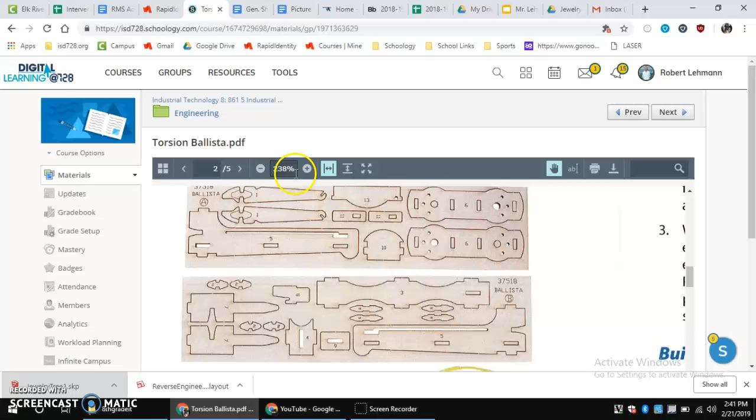So down here in the bottom, we have 3 PDFs that show us information about what you need to make your parts. Now, if I click into the ballista, it's going to open up the PDF. It does take a little while to load. And we are going to go down here and scroll through the document and find where the material parts are. Now, I'm kind of zoomed in already, it started at 238%. You may have to zoom in or zoom out just to be able to see this well.

And these have all of our parts numbered. You may realize that there's some parts that we didn't make on here. I can't remember which parts we have deleted, but we have deleted a few of these pieces. So the important part is just knowing to look over and see I need to make 4 pieces for number 2, and then 4 pieces for number 12.

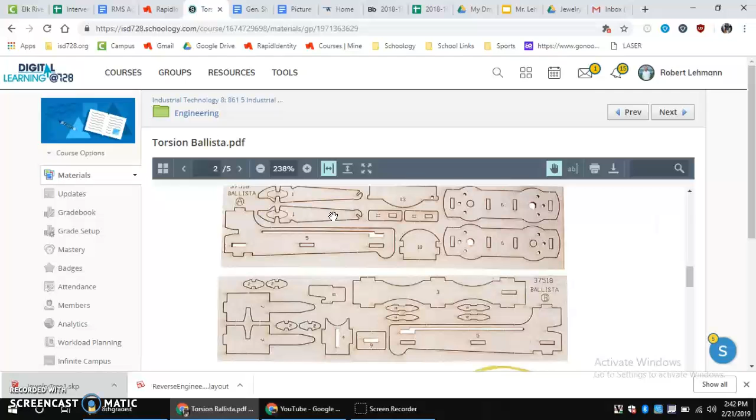I'm going to need a number 3. I'm going to need 2 number 5s, 2 number 6s, 2 number 1s, and so on. That's where we find that information out. Back to my engineering folder. And then the same thing happens in the catapult and the jewelry tree. If we click in, we can find out what we need.

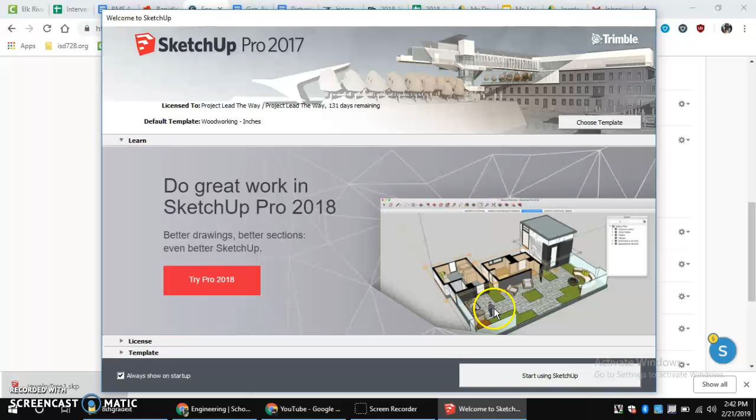Now, after we know that information, the next thing I'm going to do is go over here to SketchUp and set up my document for bringing all my parts in. This should be the same template we've been using, so we should be able to hit choose. We're working in inches. It will pop up, since my computer's running slow today. Once it pops up, the important part is right away I want to go standard views, top.

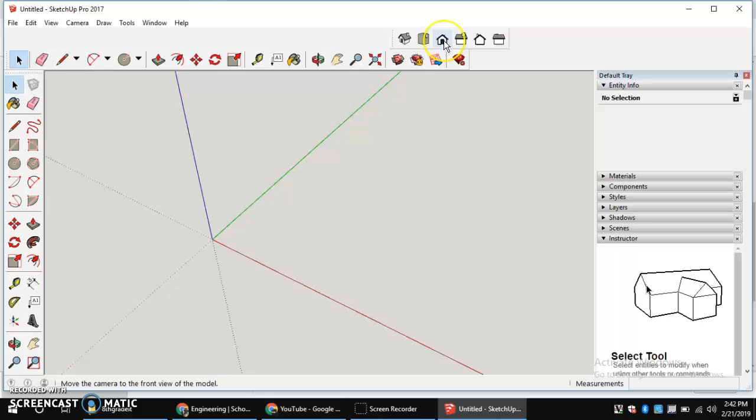And then also I want to go camera, parallel projection. You can also do camera, standard views, top right there. Alright, now the next thing that I'm going to do is use my guidelines. Please do not make a rectangle because it'll cause the laser to run around and cut where it doesn't need to. To click from my green axis, I'm going to go 11 7/8.

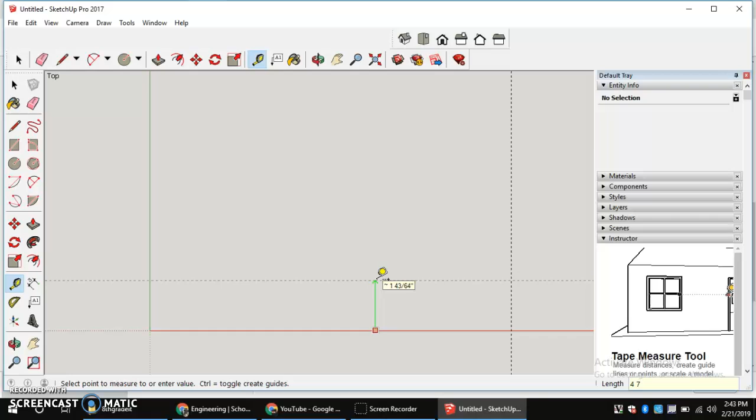Zoom in. 11 7/8, I basically have a 12-inch piece here that I'm going to be cutting it out of in this dimension, and then also 4 7/8 from the red axis. 4 space 7/8. Now, this gives me my area inside the 2 axes and my 2 guidelines where I'm going to be putting my parts.

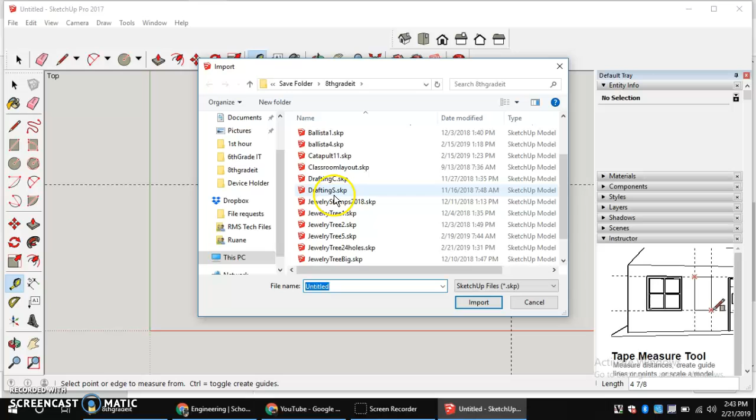To get the parts in, I'm going to do a File, Import. And I'm going to click on the files that I need. File, Import. I'm just going to grab this ballista one, put it in. Now, if I need 2 of them, you don't have to import twice. You can just select with your Move tool and then hit the Control key and move down, and you'll have 2 of those pieces.

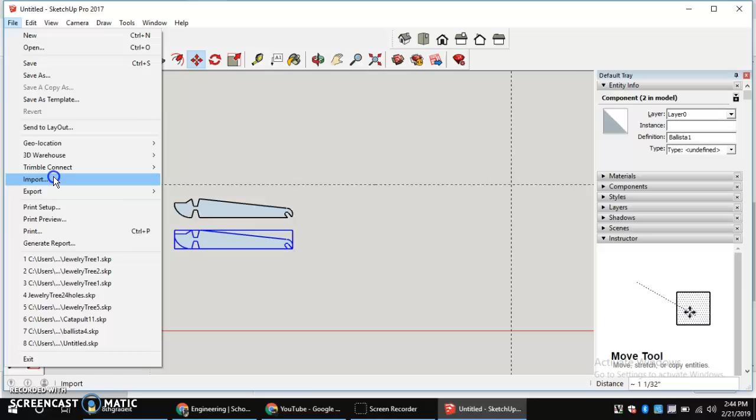Now, the other part is, once again, File, Import is how we bring those pieces in. So if I grab my other ballista part and hit Import, oh, that's the same one I did, hit Escape, File, Import.

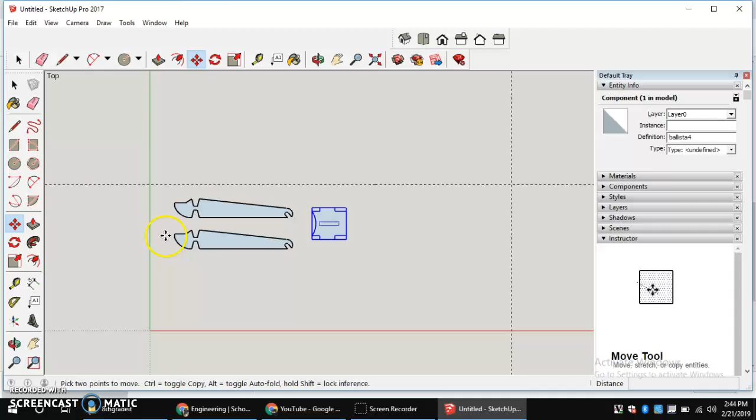Sometimes you may have to use your Move tool to select, and once you've selected, if you go over here, see the little red axes? Those will allow, if you click on them, to rotate. So if you wanted to rotate one of these like 90 degrees, you can come in there and click it and rotate it and put it where it needs to be.

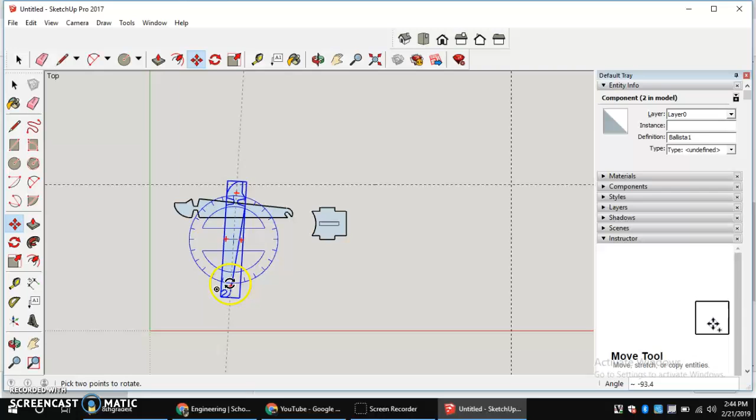My computer's kind of being glitchy right now, it's not running the way it should be.

Alright? That's what those little red axes represent. But we want to put all of our parts that are needed in this area. Once I have all my parts, in the jewelry tree, you have to make it exactly like the back page where it shows you. It says do not measure, but that's the exact layout it has to be, otherwise you can't make it fit. That's basically perfect puzzle pieces to get all your parts to fit in this 11 by 5 inch space.

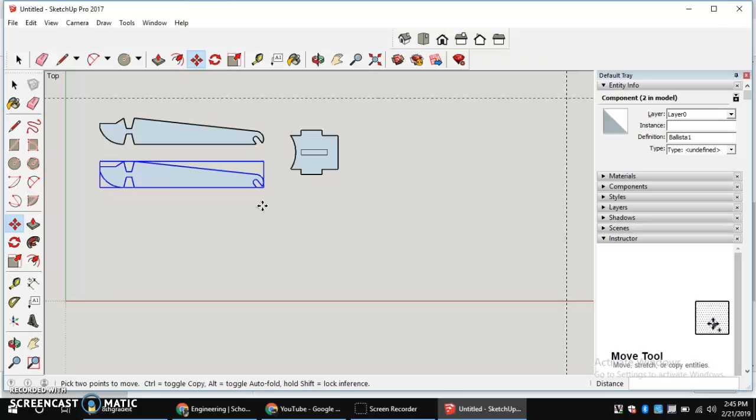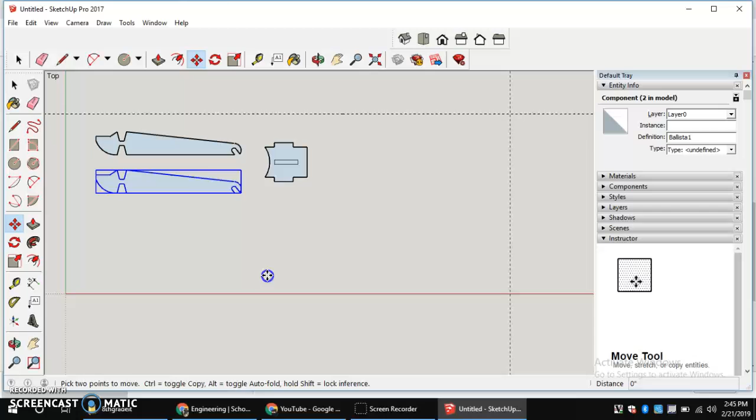Now, the next thing is, once I have all my pieces here, which I don't, instead of making you watch over and over again, what we do to save this file and share it with me is we go to File and then Export 2D Graphic. The important part about doing that is before that, I want to make sure that I don't have any extra lines that may be cutting my pieces in half. So if I have any lines that shouldn't be there, right now it gives me a chance to go in and actually erase those, or delete them out.

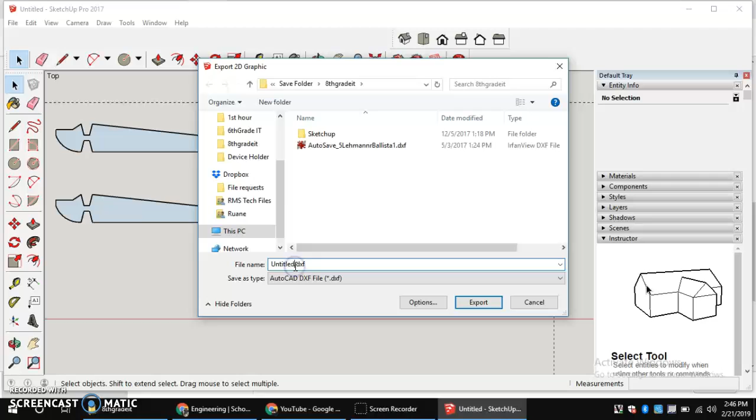Now, once I get that done, I do File, Export, 2D Graphic. The important part is this should be named what you have here. So this is Catapult. So I go over here. And then from Catapult, I want to go down and change the Save As type to DXF file, and then hit Export. Make sure your export file is going to where you want it to be. Mine's my 8th grade folder.

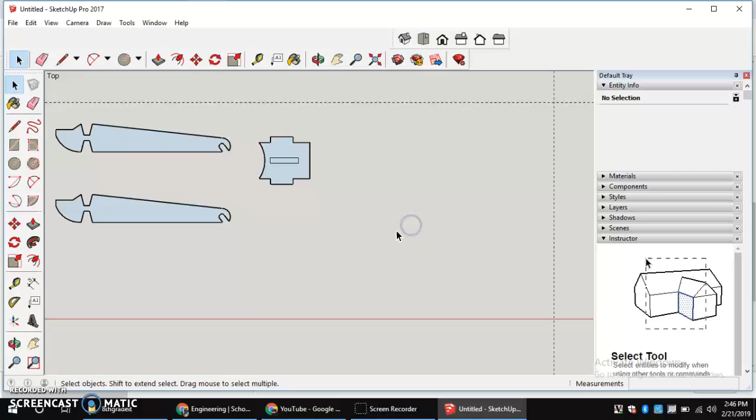Export. It says OK. Lastly, I'm going to go back to my engineering folder, and in my engineering folder there should be, which there's not yet, a Lehmann Dropbox. So the last thing I need to do is make my Dropboxes here. Now, I just added that portion where it needed to be. So right down here on the bottom of my engineering file is Lehmann's Dropbox.

So if you go into Lehmann's Dropbox, what you have is a piece that doesn't show you anything, so you have to either click it over here or explode it right there, or pop it out where it makes its own tab. And then we want to choose from our computer our DXF file. Remember, yours should be underneath your H drive, and it's named your Ballista, Catapult, or Jewelry Tree, and it should be

your .dxf file. Now, I'll show you what one of those .dxf files looks like by going to my desktop in my Save folder. In my 8th grade IT, I should have one. So if I slide down, it looks like a Catapult right here. So I have Catapult DXF. I'd select that and hit Open, and then Upload.

You guys will have to add your name, last name, and your email address before you do that, but this way I'll know whose it's coming from. When you hit Upload, it will add that file to my Dropbox. Right now my Dropbox icons aren't showing up, but they should be, and I can get those to be there. So once you do that, I will have your information.